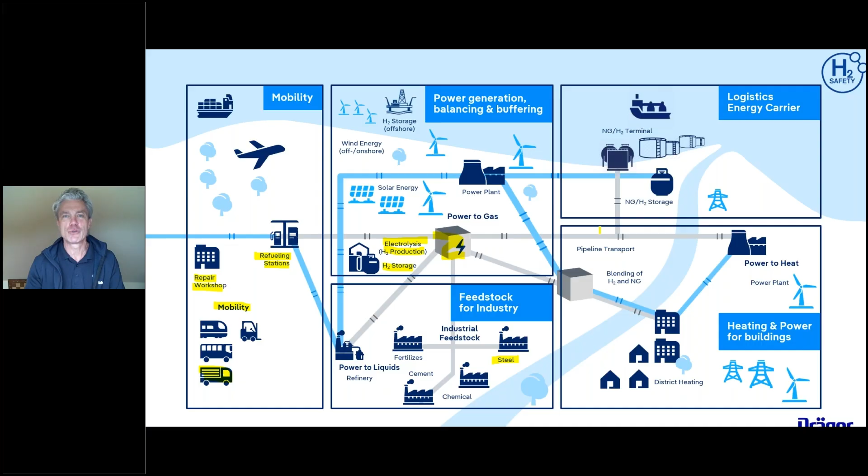We've also been introduced to some steel projects - green steel. There's a lot of demand on the world market, and we are active here as well. So there's a lot to do, a lot to learn, also from our side, so your feedback is very much welcome.

Going on in the presentation - production, storage, and transport. Nowadays hydrogen is mainly produced by steam methane reforming using gas, the majority, but this needs to change to electricity, meaning electrolysis. For storage, there are big projects for long term storage as we move into mass production - into old salt caverns, also depleted gas fields on the horizon. We've seen some projects in the North Sea, and for sure liquefaction, but that is also quite energy intensive, so it's a question how far this will go.

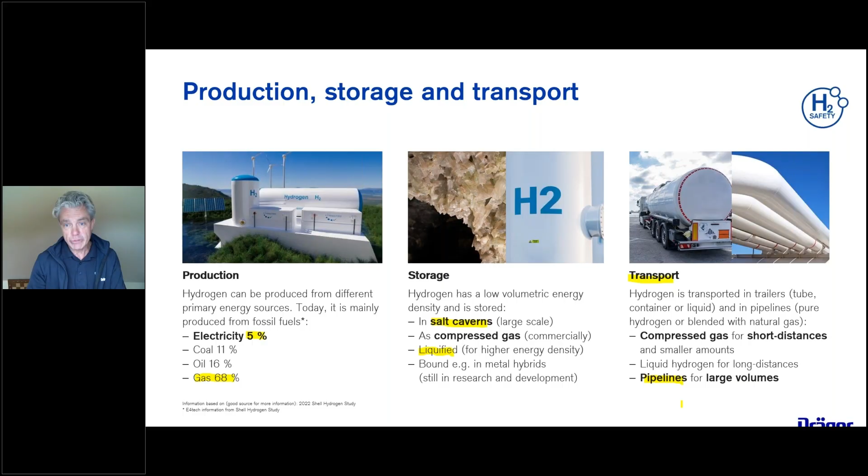And then the hydrogen needs to come to the end user. The whole transport, either over short distances or long distances via pipelines, is definitely something we look into, and we've been pulled into some projects currently as well.

Talking about transport, it's even more complex - we talk about hydrogen for trains, large vehicles as well, and aviation, with a lot of airports currently preparing themselves for the future. This could be an addition to the whole decarbonization strategy. And industry - one of the largest off-takers, steel for example, or other carbon-intensive industries as well.

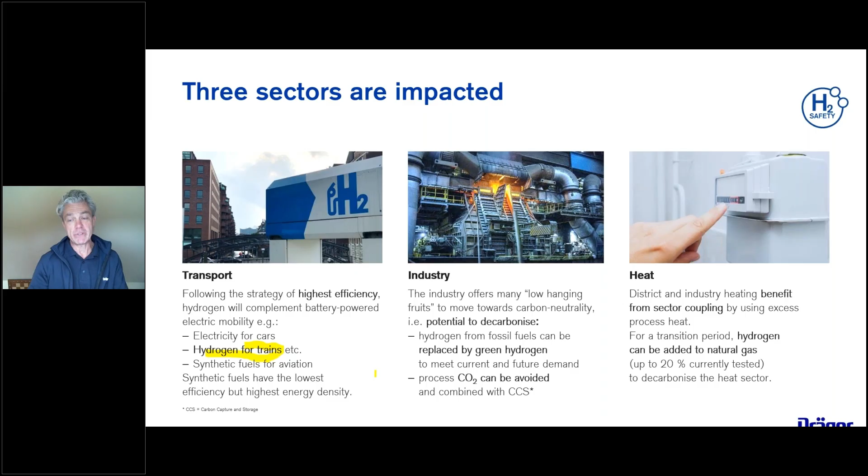Last but not least, heating - this may come a little later. We've seen some pilot projects here in Europe and in the UK, but I don't think hydrogen is currently worthy enough to be directly burned in households. So the hard-to-decarbonize industries we've discussed, or transport, will be the first ones to get green hydrogen.

Some of you may know it already, hydrogen has certain colors when we talk about that. The majority currently is talking about green hydrogen, meaning this is really zero carbon from renewable energies over electrolyzers, then producing green hydrogen. But there are other ones we could say are carbon neutral.

Like, for example, blue hydrogen. Blue hydrogen is produced by steam, this is SMR, steam methane reforming. And then the carbon dioxide is captured, either used, CCU, or stored, CCS, as well. So that means this is also part of the game currently.

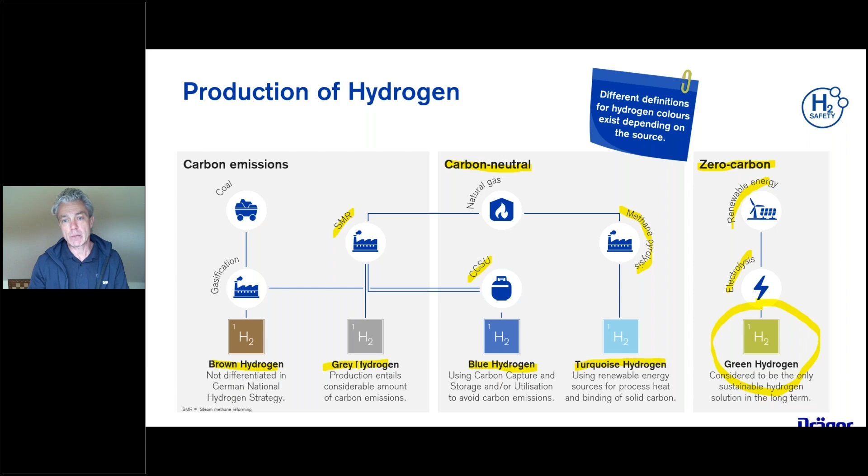And we have some other technologies as well. When we talk about methane pyrolysis, then it's called turquoise hydrogen. And then for sure there's gray and brown hydrogen, which are currently produced via gasification from coal or steam methane reforming when the carbon dioxide is not used at all.

But okay, first of all, some of you may know a little bit about hydrogen, some of you don't. Originally I'm a physicist, and I'd say 98% of the universe still consists of hydrogen. This gas is, on one perspective, quite easy - it's only one proton, one electron - but it behaves in some instances like a diva. And I will show you why.

And why is this so important, to keep these 10 safety challenges in mind? Because this is quite important for further planning.

The first safety challenge that we see is knowledge and education. So what we see here are some lessons learned from previous incidents. They are collected from the Center for Hydrogen Safety - we are a member of this non-profit organization as well. And what you can see here is that the majority of incidents that have been analyzed are, let's say, leaking connections or leaks in general.

Later it comes a little bit to material causes as well, but the majority is leaking connections and valve malfunctions. So you could say, okay, but what does that mean? It's good to know why knowledge and education matters. When you look a little bit deeper, the majority of incidents is from the operational and even the procedural planning stage. Who is involved here? People. So that means knowledge, education is really key.

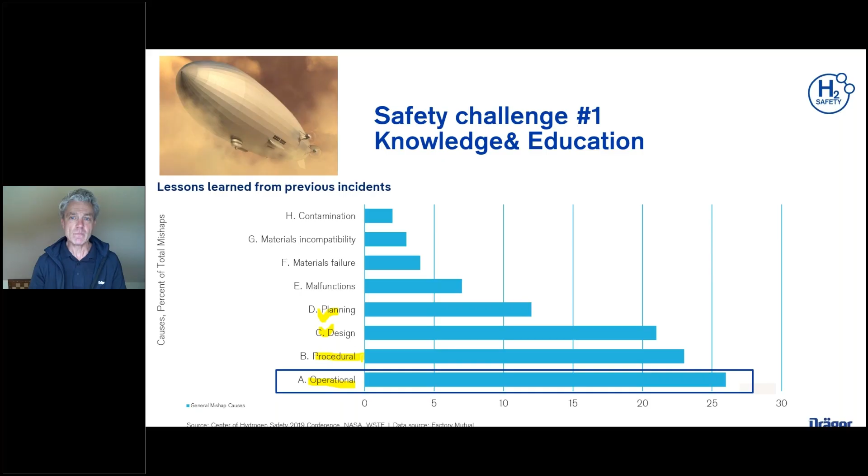There's a reason why we're here. Safety challenge 2, permeation. Hydrogen, as I said, is the smallest molecule in the universe. It can permeate and embrittle materials under special conditions, even stainless steel. But this has been known for centuries - it's just a matter of knowledge, right choice, and handling and maintenance.

Here you see the founders of Dräger. It's really 130 years ago when we started producing the first gas pressure reduction valves. Some side note, the first reduction valve that Dräger made was for a beer dispenser. So we started from there - it's just a funny side note. But from there we started, and then this whole endeavor within Dräger in medical and safety started.

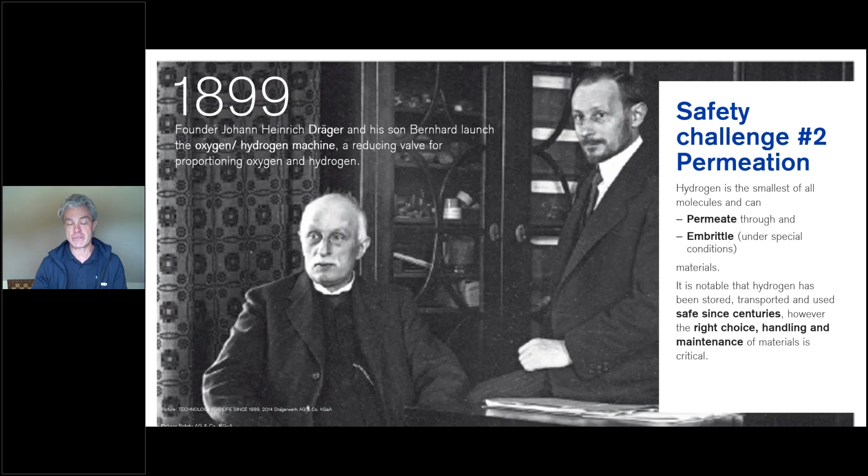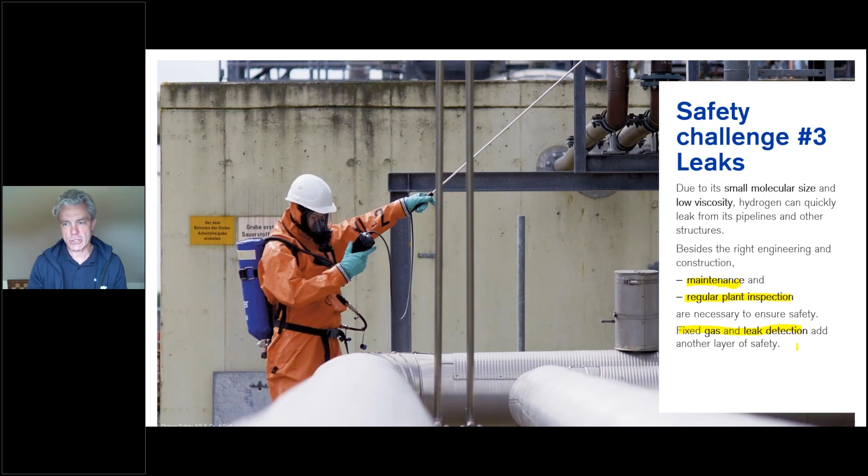Safety challenge 3, leaks. Due to this small molecule size and low viscosity, it needs really the right engineering and the right construction. That means maintenance of the facilities and regular plant inspection is needed. It's in most cases regulated as well, and it needs fixed gas and leak detection as a layer of safety. I will come later to that.

Number 4, carbon monoxide alarms. Who could say, hey, why is this so important? In some applications, talking for example about the steel industry, you have both - you have maybe carbon monoxide and you have hydrogen as well in this environment. And you have to know that these CO sensors can be cross-sensitive to hydrogen.

So that means you may have a CO alarm, or your alarm device gets a ping, but you do not know - is it CO or is it hydrogen? So that means, once more, knowledge - you have to know if the sensor is compensated for hydrogen. Side note, Dräger has these sensors. Otherwise you have false CO alarms, and that can happen.

Number 5, gas pockets. Ammonia, methane, and hydrogen are less dense than air and form gas pockets. This is very important to know, especially during a risk assessment, especially locally, where if you have a possible leak, hydrogen, methane, and ammonia as well can form gas pockets.

Why is this so important? We talk about explosive zones. If it's outside, that's maybe fine. Maybe sometimes you have mixed infrastructure, or it's even indoors. Then you definitely have to know where it could possibly be happening, especially in environments that are grown already.

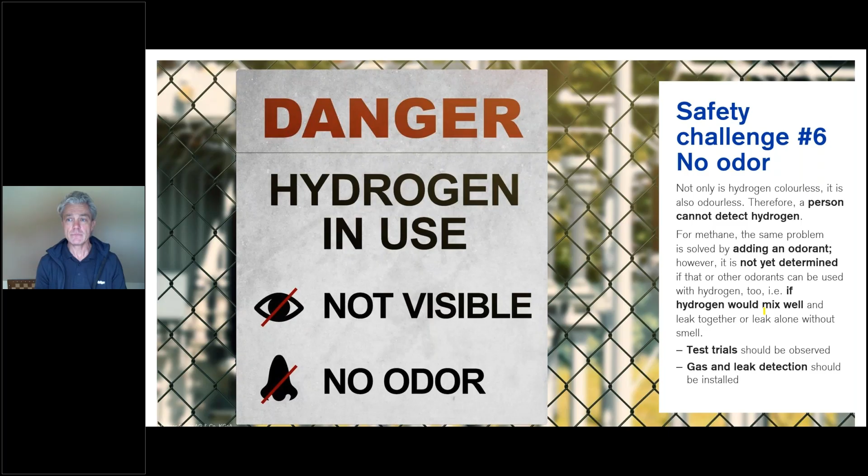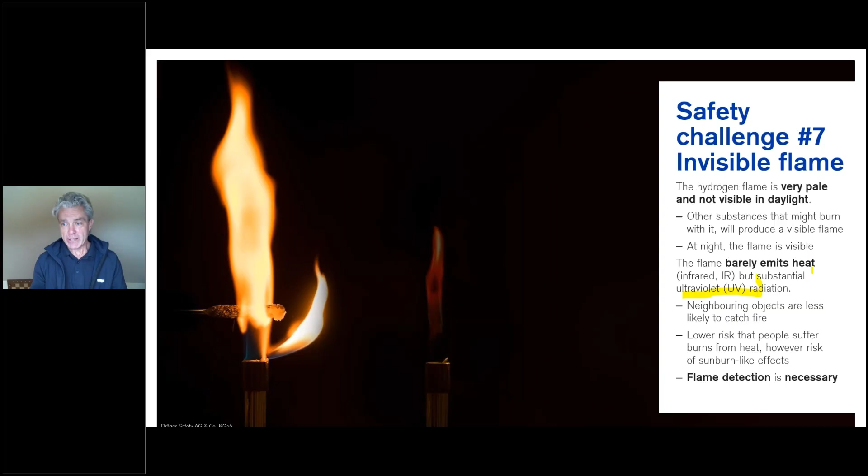Neighboring objects are less likely to catch fire, so it means you may have a fire here, but you cannot see it. But flame detection is necessary.

Number 8 is invisible for IR, meaning a purely IR sensor cannot detect it because of missing CH bonds. But there are catalytic sensors that should be used, and they can detect it very sufficiently and very sensitively as well, but they need to be calibrated.

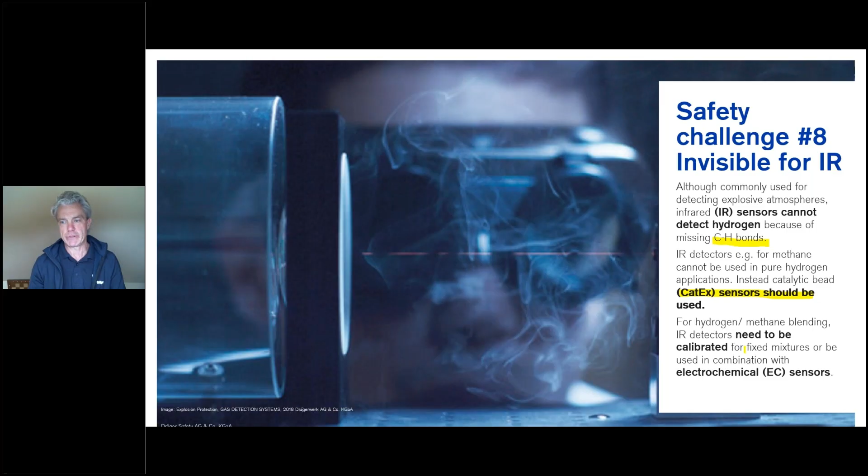Number 9, Ex protection. The biggest threat from hydrogen is that it can lead to an explosion - I'll come in a minute to what that really means. This means, depending on how likely an explosive atmosphere can occur, Ex areas have to be classified, and the classification needs to get stricter.

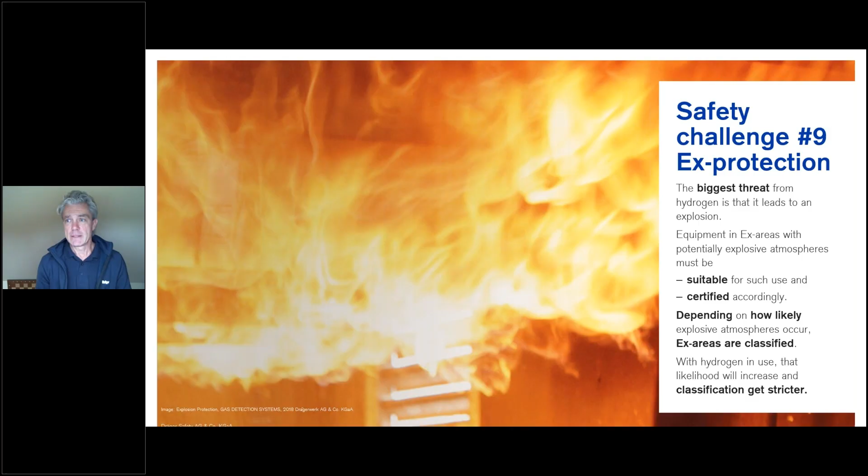Last but not least, number 10, ignition. Leaks of pressurized hydrogen can also self-ignite without an ignition source. You could ask, okay, why can that happen? There are 2 things that you may not know about hydrogen.

The first thing is maybe known: the self-ignition temperature is, correct me if I'm wrong, roughly 580 degrees. If you have surroundings with a higher ambient temperature already - it could be in the steel industry, petrochemical, or somewhere else - it could happen that hydrogen self-ignites.

And there comes another thing into play. As I said, hydrogen is a kind of diva. Hydrogen is the only gas in the universe that has a reverse Joule-Thomson effect. A normal Joule-Thomson effect is like having a kind of hairspray, and you spray it on your hand - what happens to your hand? It gets cold. If you have high pressured hydrogen and release it, vice versa, it gets hot.

So that means if you already have a higher ambient temperature and then this reverse effect for a high pressured leak - in the mobility sector you have either 300, 500, or even 700 bar, with 1,000 bar in discussion - you can see what can happen with a high pressured leak.

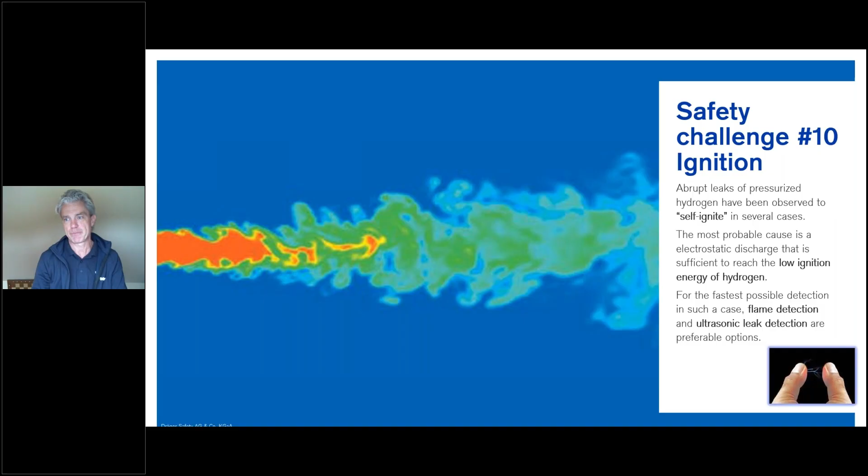That means outside it rises quite quickly, but has other disadvantages when it goes into the atmosphere - hydrogen, you may not know it, but it's a secondary greenhouse gas, so there's also discussion around that. And what I would definitely love to mention here, the burning velocity is 7 times higher than gasoline or methane. That means the explosion energy and destructive energy of a hydrogen explosion or deflagration is a lot higher than for other gases like methane.

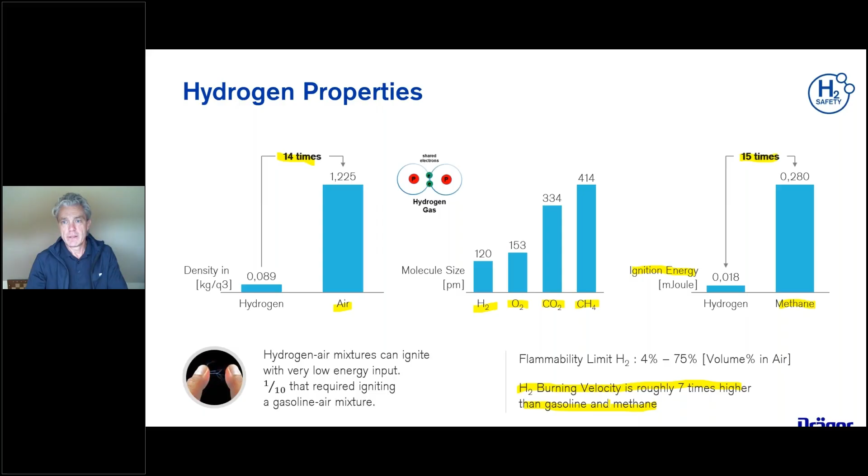But you could ask yourself, okay, how to start? First things first, be aware of the risk. We've mentioned already hydrogen is odorless, colorless, tasteless, a kind of diva in the universe, and our human senses will not help you detect the leak.

So what does that mean? Three things. First of all, line of sight - how to see it. There are technologies, and we may come later in other webinars to look deeper into that: open path gas detectors, flame detectors, very important, or even gas cameras. Then the point detector, which means really smelling. Flammable catalytic gas detectors are here the right choice to choose from.

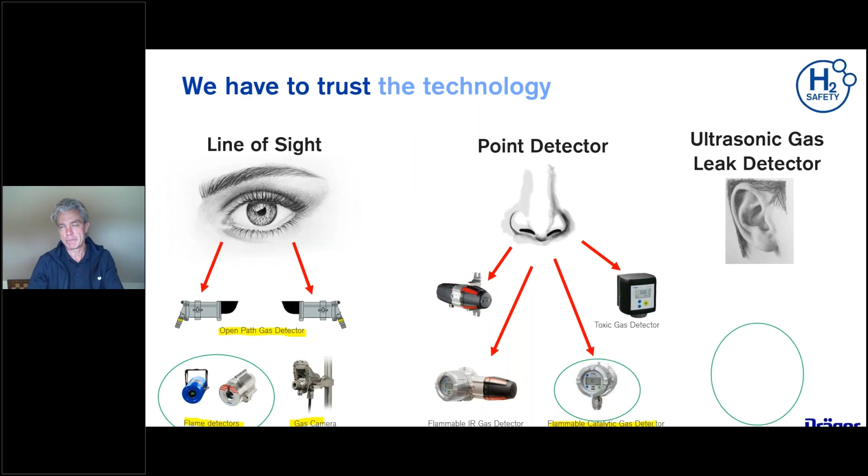And last but not least, which is very important, to hear a leak before it gets to a certain level - above 4% volume concentration. So the earlier you know about the leak, the earlier you can look for alarm mitigation measures. That means ultrasonic gas leak detection is very important here, especially for hydrogen.

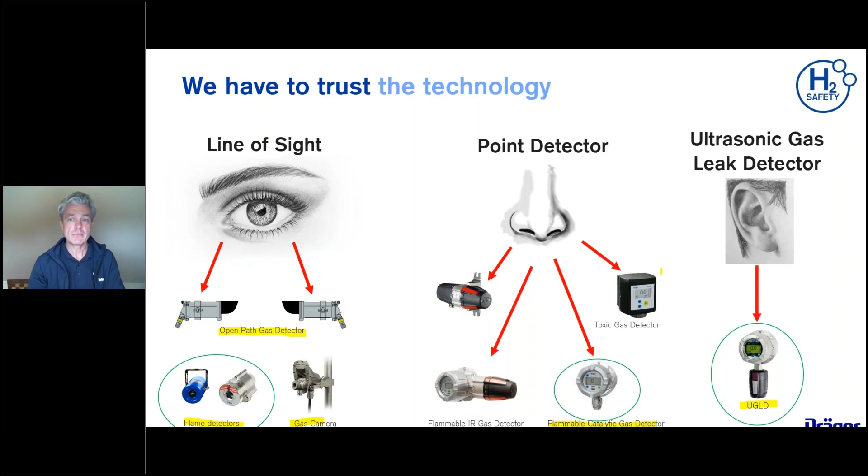Having said this, we all have a duty, since we are all in this business, and we have to know at least the basics. I can only scratch the surface here, but every country has basic laws, legislation concerning health and safety at work - and I'm sure we have some health and safety engineers in this round, so you know it.

There are country by country accident prevention regulations, maybe collective agreements and government regulations about workplace safety, and then at the end, ISO norms, NFPA norms, IEC norms. There are a lot of technical rules, and you definitely have to know them. This is not an excuse if it comes to an accident to say, oh, I didn't know that - you are liable at the end as an operator.

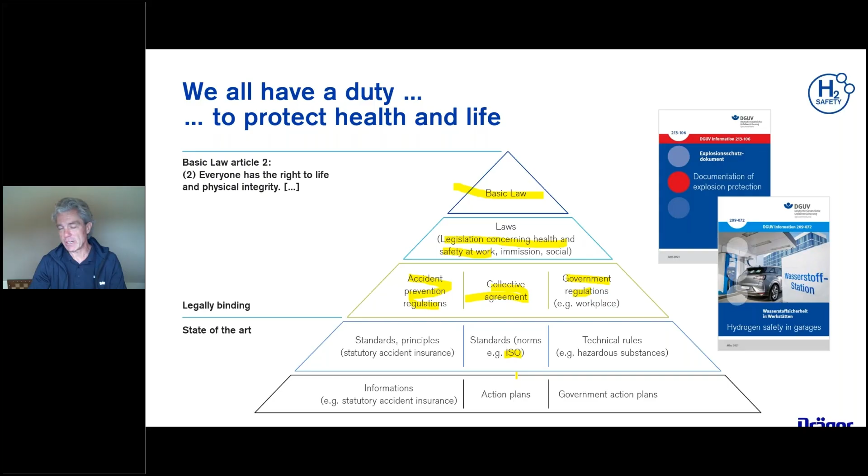This is maybe a separate webinar when we look deeper into what needs to be known in terms of all these norms and standards. But at least I would love to give you an overview here of what you have to know. At the end, either on your side, with help of a company like ours or maybe someone else, normally you have to ask yourself a couple of things, and maybe run safety consulting workshops.

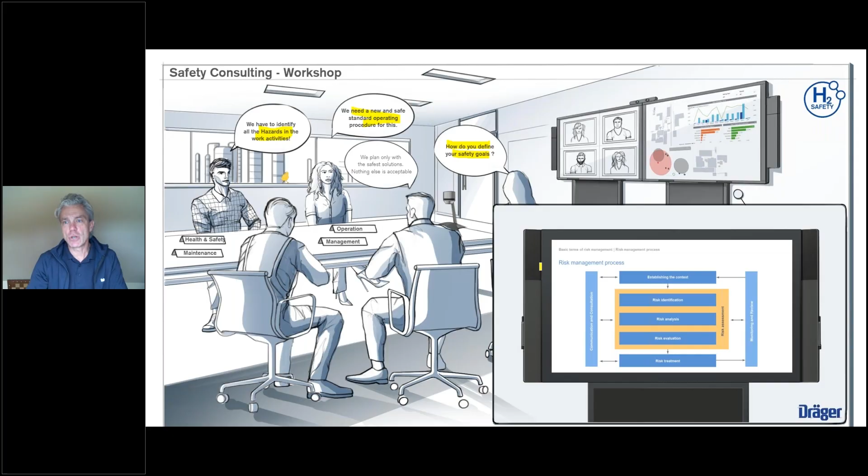These are the questions: how can you define your safety goals? And do you know all the hazards? This is quite important. And for that, you can go through a risk management process.

You can look through, when we look at a plant life cycle, from concept phase to - where's my mouse? Here it is - concept phase, the scope and risk phase, the requirements, nailing down, over planning and scheduling, and so on. And over all these phases, you have to look at what needs to be done, when. This is a big question.

So that means you have to define your safety goals. Here you have to know what kind of regulations really need to be known. Based on that, you can set up your safety concept, and so it goes on.

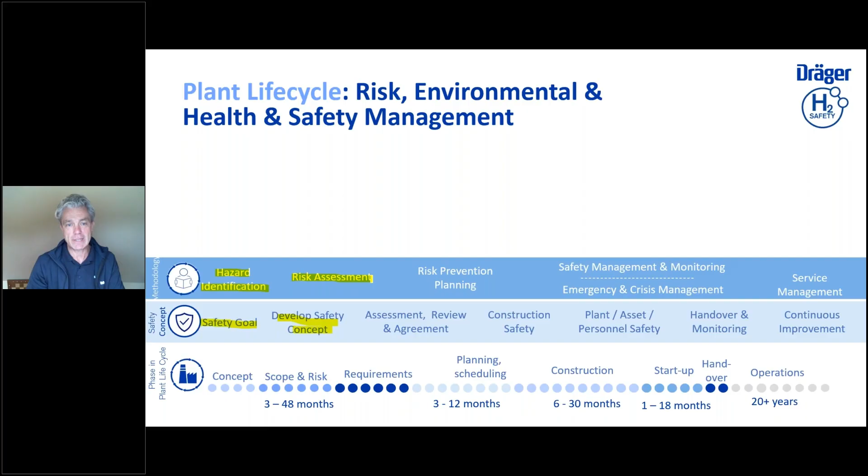As I said, you need a hazard identification, including a risk assessment and later risk prevention planning. At the end, different methodologies can be used: risk matrix, LOPA studies, fire and gas mapping and modeling - we can go into this a little deeper, not today, maybe later.

Training of your staff - as I said, safety challenge one is training and education. At the end, you have to document all this. Maybe you are already experienced with other gases or operations, then it's fine and maybe boring for you. But for some of you this is new, and especially for hydrogen, I can tell you from experience over all the projects we've done in recent years, sometimes the devil is in the detail.

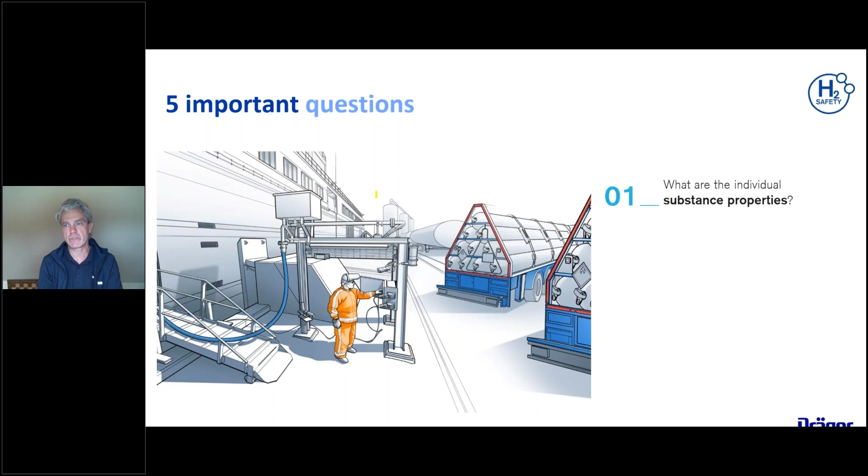So there are five important questions you have to ask yourself. What are the individual substance's properties? As I said, with hydrogen you need to know how it will behave and what is so special about it. What amount of hydrogen do I accept, either locally stored, and so on? What damage scenarios can occur?

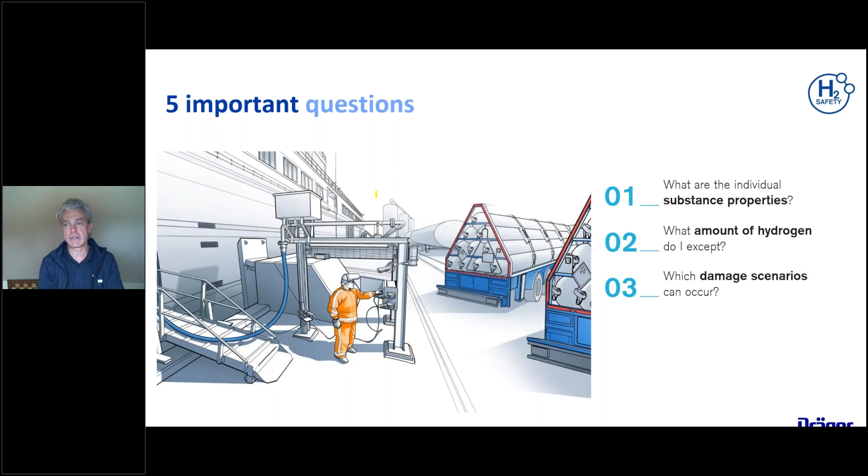This is really an outcome of risk analysis, and it gives you a clear view on what needs to be done, architecturally, process-wise, and so on. What type of activities in general are performed, like we see here - it's a kind of bunkering scene, but it can be something else as well. That needs to be listed down, and what safety measures have already been taken. I guess you already have something, but this needs to be part of the discussion. And at the end, you have to see where the gaps are.

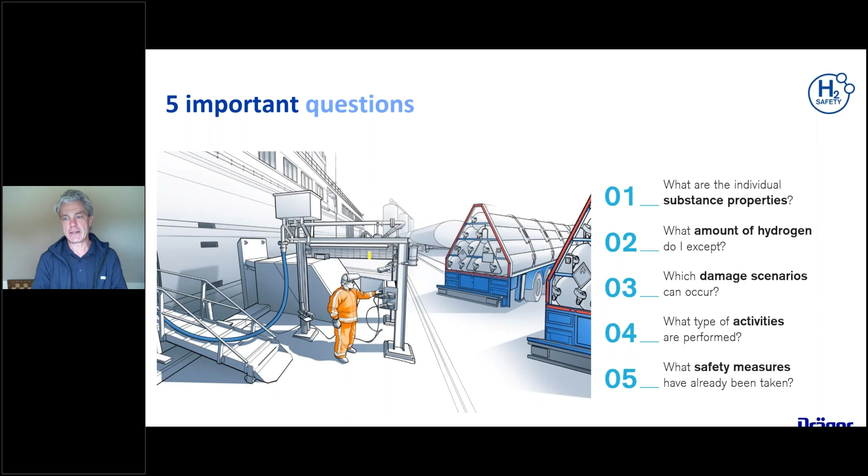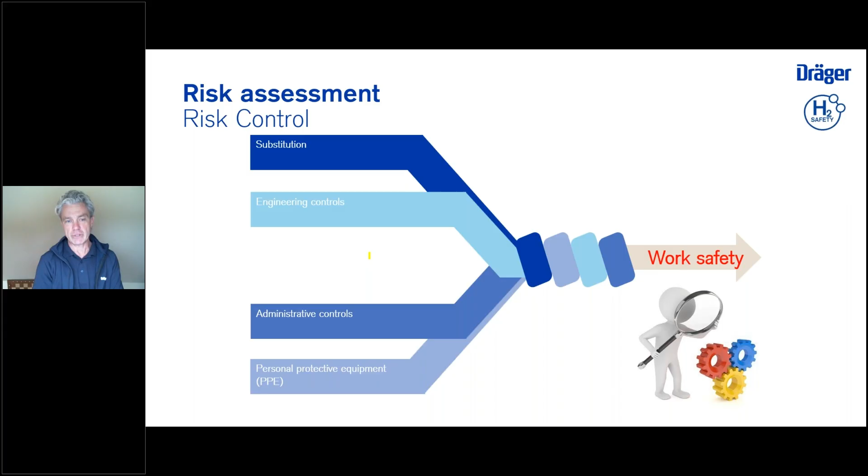Having said this, risk assessment has to do with risk control. First of all, you could say substitute - but we need the hydrogen, we want to work with hydrogen, so substitution will not work. Engineering controls, yeah, for sure, this is definitely important, I will come to that. Administrative controls is also like training, process descriptions and training on these kind of things, and documentation. And at the end, when nothing helps, another safety layer, the personal protective equipment can also be part of that whole picture.

So when we look at such a process, maybe you know this, maybe you've seen this, maybe you've done this already in your organization. What do we want to do? What is new for us while we introduce hydrogen here? Then you start the risk assessment: risk identification, the analysis, and the evaluation, and at the end, the treatment - that means taking measures. You have to communicate them, and at the end you have to monitor and review this on a daily, weekly, monthly basis, and the regulatory bodies will look into that.

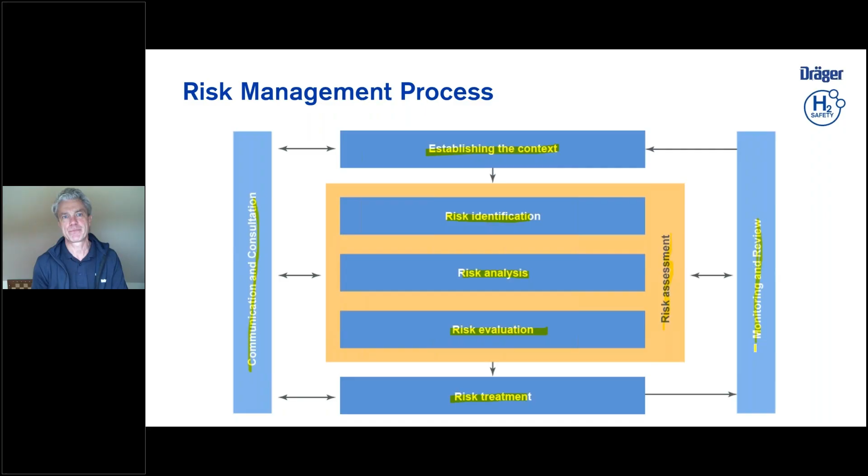Safety consulting - what is that? Normally you have a kind of environment where you work with hydrogen. Can be a complex environment with a lot of hazards, and you may identify them. Maybe a lot more persons are involved here, maybe you have a storage facility, and then you go through it. You just check it, you do a hazard and risk identification on site. It could be an addition, that you want to work with hydrogen from now on, maybe it's a facility that you own already, it could be a maintenance facility, it could be something else. But you have to start at this risk consulting and risk identification measures.

Then you do a risk assessment, so you really look into the details. Do I have the right equipment that can detect hydrogen in these procedures? And you really look into these tables - I will come to that in a minute. But last but not least, what about escape when something happens? Is everyone trained? Does everyone know the muster points? When it comes to the fire services, do they know what they expect? What about the data, do we know the concentrations? And so on and so on. So this is part of such a safety consulting and risk assessment.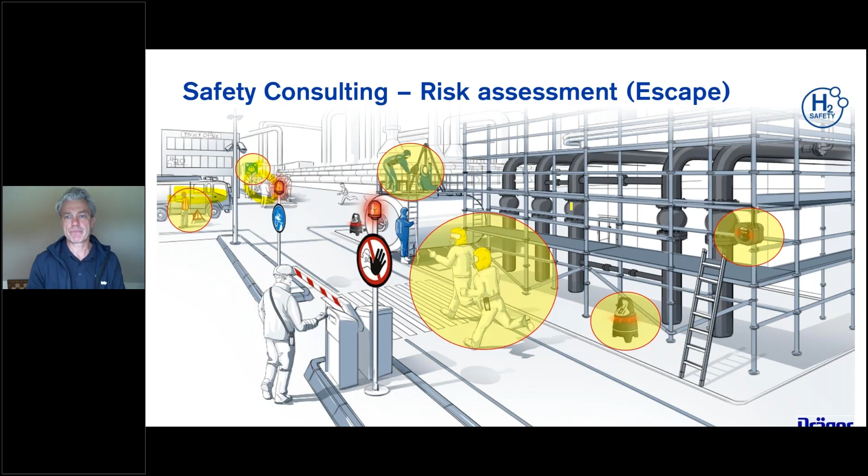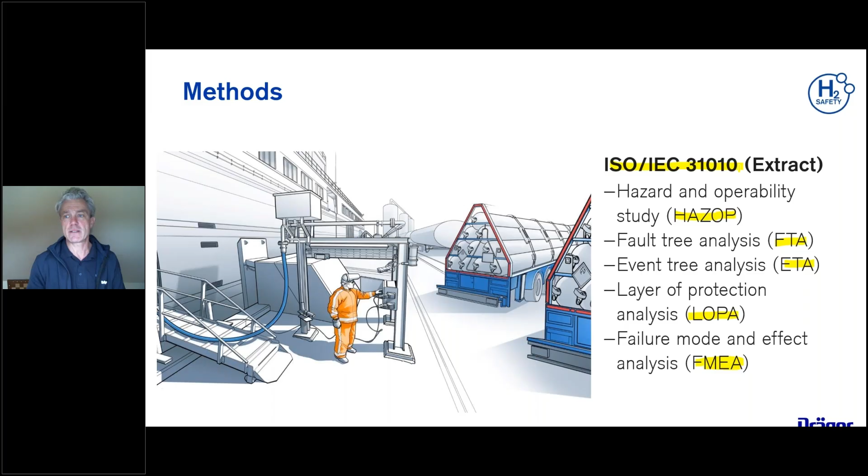We are concentrating on escape as well. Having looked into that, what kind of methods needs to be known? It's just an extract - classical hazard studies, it could be a fault tree analysis, it could be an event tree analysis. LOPA, I've mentioned this, maybe some of you know it, but we can have a separate session on this as well. And for sure an FMEA, which is quite known in the industry as well. So this is part of ISO IEC 31010, and it's definitely a must that you have to go through.

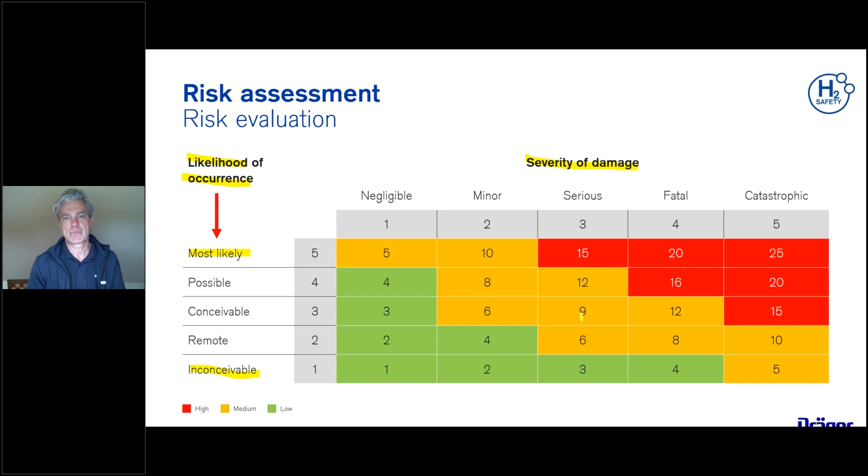Risk assessment is normally done in several ways. One thing is that you define the likelihood of occurrence - it can be most likely or maybe inconceivable. And then you look really with your specialist about the severity of damage. Each and every working procedure will get a kind of number, and if you go through that at the end, you will get your measures, and then you have to do something. That means either eliminate the hazard or substitute the hazard, which will not happen because we cannot eliminate the hydrogen - we want it, and we cannot substitute it. So it starts here with engineering controls - you have to isolate people from the hazard.

Administrative control changes the way people work, but it starts with isolation. Fixed gas detection is one thing, so that means really early leak detection. You have to have explosion-proof electrical equipment as well, clothing due to the low ignition energy, a planned fire protection.

Processes in place as well, and for sure ventilation when it's inside, even outside. I've seen electrolyzer facilities, they've got a roof, kind of a Venturi roof, so that you have natural ventilation possible. But here I can tell you, with these Venturi roofs, you could have weather conditions where they will not work. So I figured this out here.

We had a project here in Germany. I've seen an electrolyzer with a Venturi roof, and clearly talking to weather experts, it's okay, we could have fogs and so-called reverse weather conditions where these kinds of Venturi roofs will not do the job.

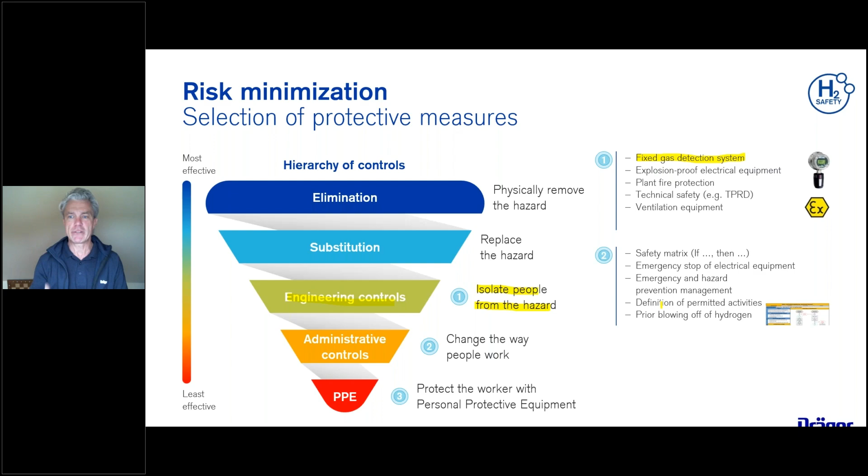So these are obvious things. And at the end, last but not least, protect your people from the hazards. It could be mobile gas detection that you wear, could be a thermal imaging camera which is sensitive to hydrogen as well. I think it's flame cameras as well, ESD, safety shoes, and so on.

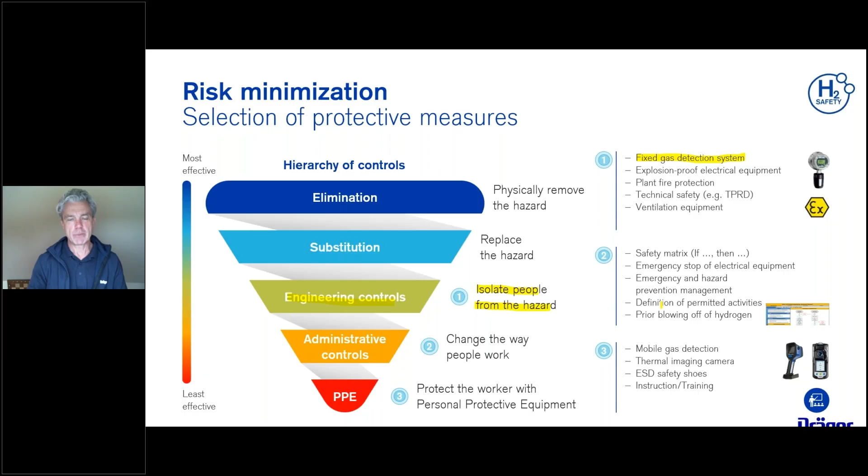So you know it, I think this is clear, but at least it gives you where to start and where to follow this hierarchy. Explosion protection: there are, let's say, three sectors. The first is prevent an explosive atmosphere, so this is the primary explosion protection layer.

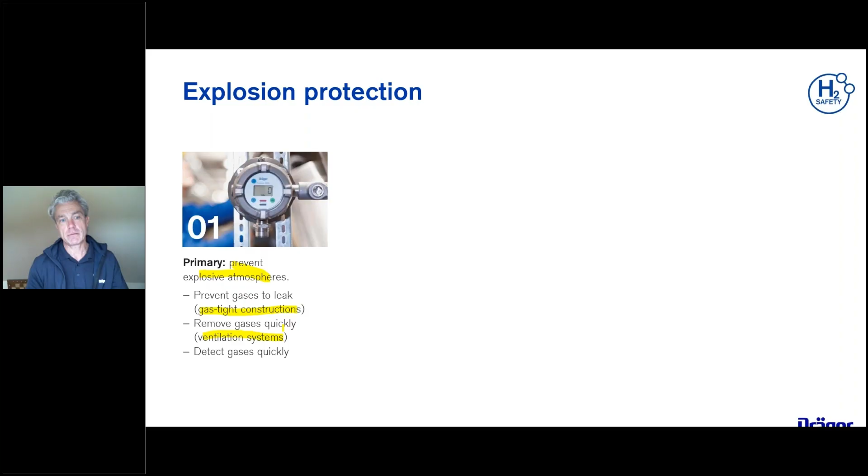And then, last but not least, detect gases quickly. That means as early as possible, at very low concentrations, remembering what I said about ultrasonic gas leak detection, so that it's even, especially outside where it dilutes quite quickly, the gas has to come to the sensor when we talk about electrochemical sensors.

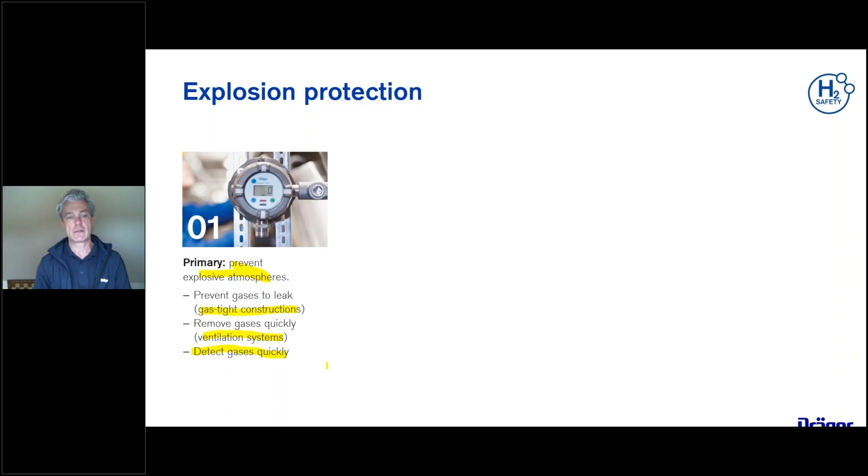But ultrasonic is definitely a thing where we can very early detect already a leak, also very small leaks. Secondary is prevent ignition sources. Yeah, we've mentioned this a couple of times: Ex-certified equipment, mechanic instead of electrical equipment. Quite important when we talk about maintenance facilities where we have maybe electrical ventilation on top of the roofs. I've seen this as well.

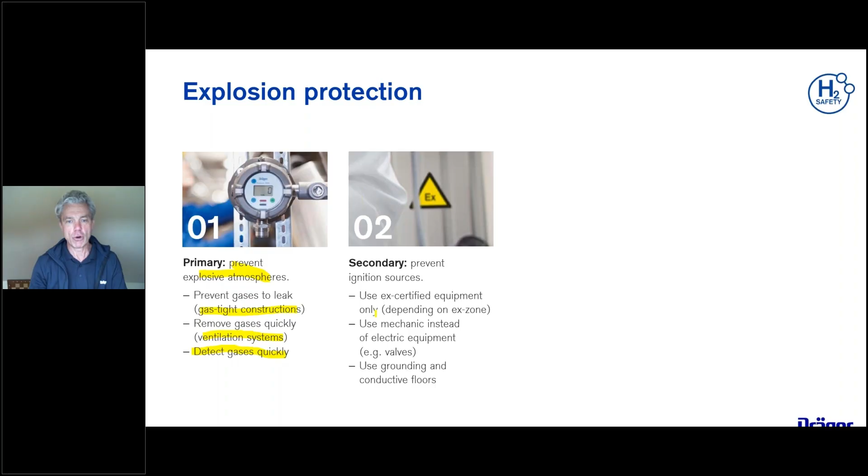So this needs to be thought over, and grounding and conductive floors. And then last but not least, tertiary. It referred to constructive explosion protection, so that means you have to have special fireproof and retardant materials and walls and also ceilings.

I've seen explosions already on test facilities, and I can tell you this is eye-opening when you see what kind of destructive energy hydrogen really has when it comes to an explosion. And the velocity is a lot higher than for other gases. Use pressure relief valves and so on, and mark ways for evacuation.

This is a no-brainer. Gas detection is seen as a primary explosion protection measure, and is to prevent explosive atmosphere before it really comes to the extreme.

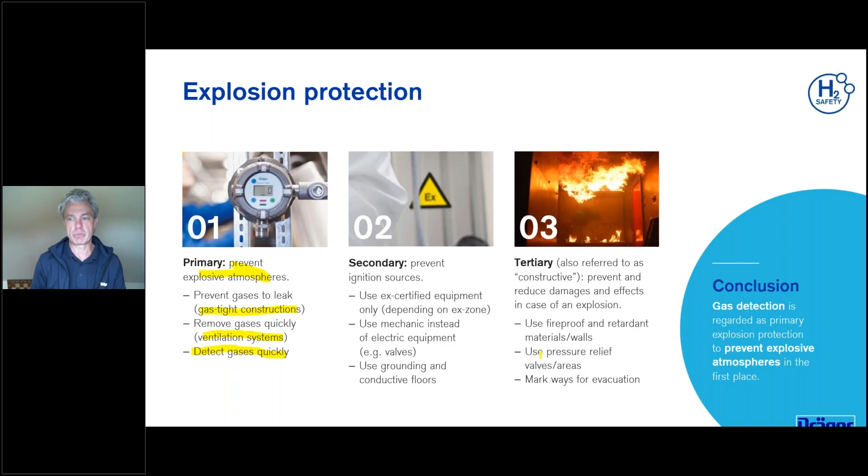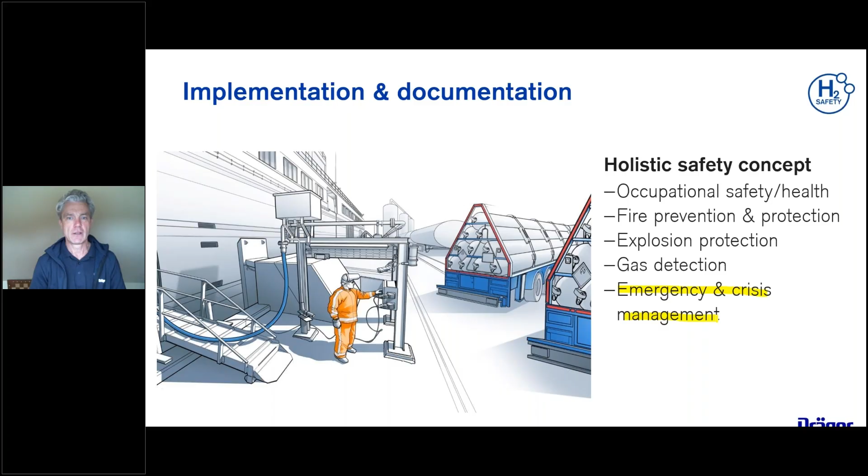Implementation documentation, as I said, holistic safety concept. This is audited as well. So to be compliant and to take your duty, you have to have a holistic safety concept, including all the things that I've mentioned here, including at the end as well an emergency and crisis management plan. It depends on the volume of hydrogen that either you're producing, storing, or transporting. This could be part of this as well.

Round this up: is hydrogen safe? Hydrogen has some pros as well, because hydrogen is not normally explosive itself. As I said, it's normally not self-igniting. When it comes to higher temperatures it is, but normally under ambient temperatures, not. It is not oxidizing, it is not toxic, it is not carcinogenic, it's not acid, and not radioactive. So these are some good ones.

But on the other side, it's explosive at certain conditions, 4 volume percent upwards. It's extremely flammable, and it's challenging for safety and requires remembering the 10 points, education training, it starts there. You have to have knowledge about the equipment and the materials, protection measures. It is colorless, odorless, so our senses will not work. It is almost invisible when burning, and suffocating when displacing oxygen as well.

So that means, in conclusion, hydrogen has some safety advantages, I think this is clear. It's very highly flammable, and it bears safety challenges. So does it keep you off from dealing with hydrogen? Not necessarily. It's a matter of, I have to know it, I have to look deeper into that. I have to know the regulations and the compliance, and I have to know what kind of protective measures are needed.